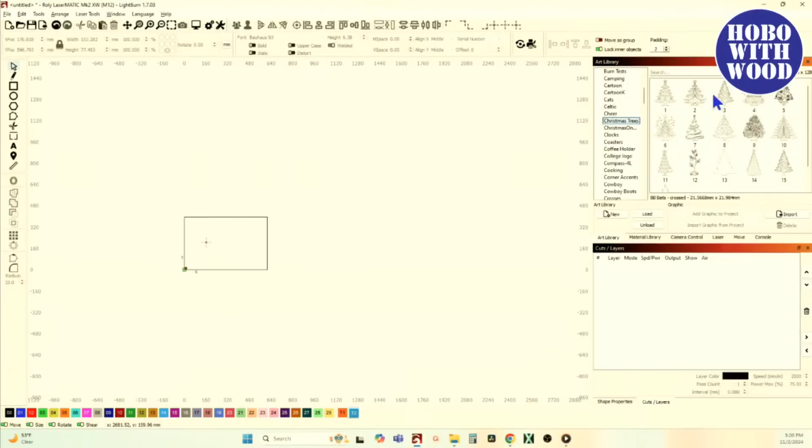I just double click that, bring it in over here, and we'll zoom into that. And while that looks pretty symmetrical, I can see right now that's a little bit cockeyed. It's not perfectly straight up and down.

For that reason, anytime I'm doing a piece like this where they're going to interlock, alignment is really crucial, at least it is for me. I'm a little bit of a perfectionist. When I slide these together, I want everything to line up where the seams are at. If it's not perfectly symmetrical, then you have to pay attention to how you assemble it. You could still slide it together so the asymmetry works, but this side would be different than this side, but only if you slid it together correctly. So I like to pay attention to my symmetry when I do these kinds of things.

Let's put this in line mode. If I were to bring a toolpath over here and put it right at the top of the star, get right to the top, right there, as I come down, you can see that star is not quite in the middle. That's not in the middle. These guys here are going to be eliminated, but the points are not lined up exactly in the center. That's what I'm looking for, and that's also why I do what I do to try and create the symmetry by eliminating half of the piece.

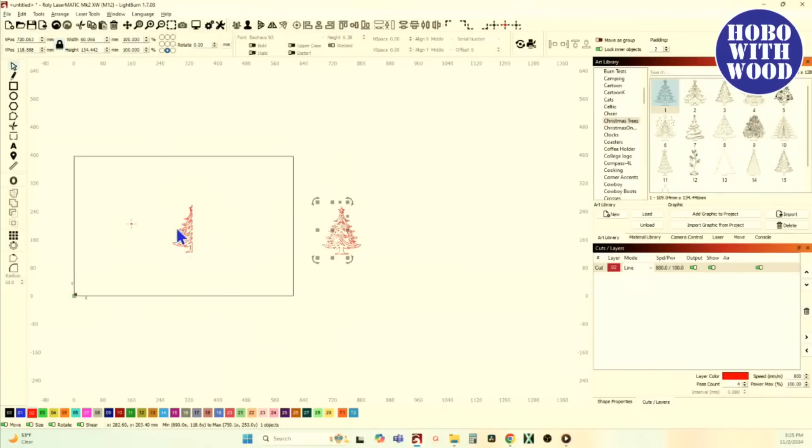But then over here, you can also go to Tools and use Cut Shapes, Alt-Shift-C. Now I want to show you the difference between cut shapes and the Boolean selection. When I cut shapes, I've got this half of the tree highlighted, but the other half of the tree is still there, whereas here it got rid of the other half of the tree.

And when I move this, it didn't cut completely because I must not have had something just right, but it leaves you with open shapes. This is completely open. Now, it's not to say you couldn't do this, but I don't know why it didn't cut that up there. I'm curious about that.

Was it not grouped? Yeah, that's all grouped together. Alt-Shift-C. Huh, I don't know why it did that. I don't want to go chasing that rabbit down the hole to find out why it didn't cut that piece.

But you could still make this work by, once you've edited that one problem, duplicating it with Control D, and then flipping it—not that way, stupid—and then bringing them together and welding them, and you'd have this little funky thing in the middle because everything wasn't lined up.

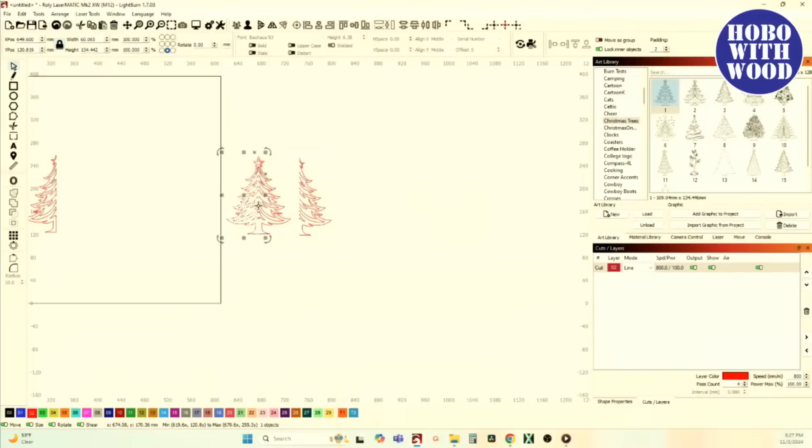But that wouldn't be a problem because of what we're going to do. We're going to use this option over here. I'll say Control D, duplicate it, flip it, move it over, and I can already see it's not going to line up perfectly. Can you see the taper, how it looks like it tapers away from each other?

We used a rectangle to cut that in half, but if I just take my padding off of there to 0 and dock that straight over—if I go in here, you see how it's not touching there.

That's because there was a little bit of inconsistency, it wasn't completely uniform in its design. You can overcome that by simply moving each side in to keep everything symmetrical. So with my control movements, units and grids, I set my control arrow movement to 0.02 millimeters, hold control and arrow the one side to the left, then select the other side and control arrow to the right. That gives me a little overlap where it wasn't touching before, now we're golden. So I hold shift, select those, and weld it together, and now I have a perfectly symmetrical Christmas tree.

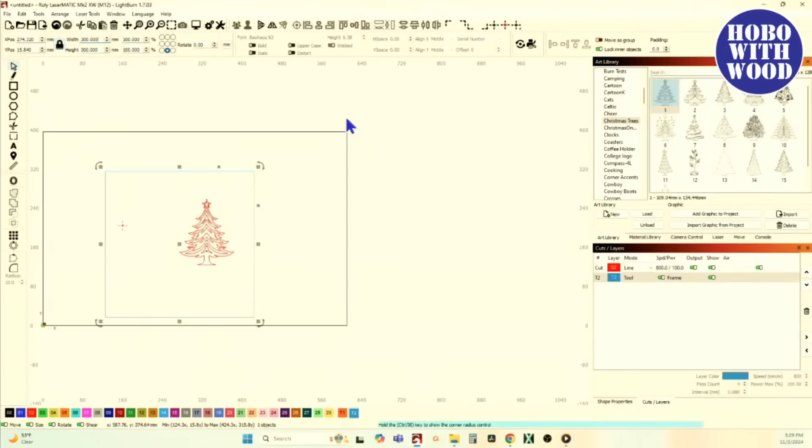At this point I might take, since I'm working with one of my most common pieces of material, my premium Baltic birch, which is 300 by 300 square, put it on a tool path and place it in the bottom corner. Also, by designing this way, if you want to maximize your material and get the absolute most out of it, leave as little meat on the bones as possible, design it within the workspace of your material so you can see, okay, this will fit, but look how much waste this is causing.

But if I shrink it down just a little bit, I could then mirror it, flip it, and put one more beside it. Now I'm getting two out of one. And then you can always scale that up if you wanted to make it out of one big piece.

So I've got my symmetrical Christmas tree here in the corner, and right now it is only 135 millimeters tall, or about 5 and a quarter inches.

I'm going to show you this, it has nothing to do with design, but if you're not familiar with the anchor point, it's what I call it. LightBurn doesn't call it anything, but there are 9 dots up there in the top. I think they might call them radio buttons, but they don't really have a true name for them. I call them anchor points because I lived on a boat for 7 years, and whenever you drop your anchor, you hope your anchor is fixed, your anchor does not move. Your boat will pivot in the wind and current around your anchor point, but the anchor never moves. So those 9 radio buttons up top, I call those my anchor points.

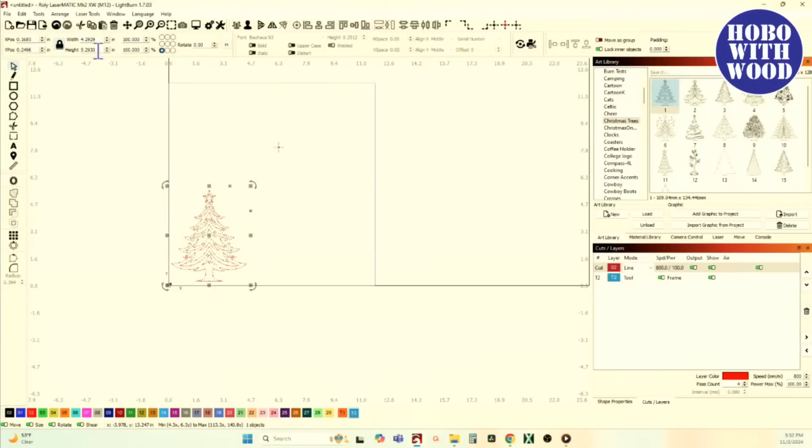Right now if I've got this positioned down in the bottom left corner of that toolpath, and I want to scale it but don't want it to move from this position, I'm going to drop my anchor in that bottom left corner. Then if I start scaling it up, with my aspect ratio locked, going from 5 and a quarter inches to 6 and a half inches, it scales up and away from that corner, so I don't have to reposition my design.

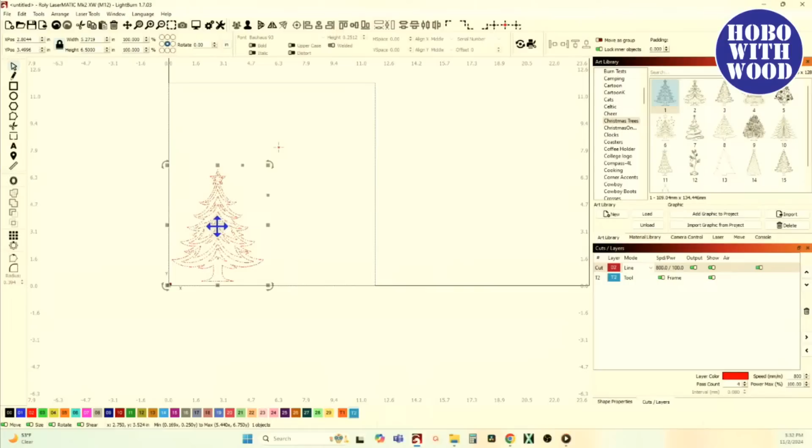If you get in the habit of using these, the most common and effective place to put the anchor when you're done is in the very center. That way, when you're scaling and changing things, it scales out in equal directions. But there are times when it benefits you to drop your anchor in a different point.

So now we've talked about anchor points. Now I've got this, and it's 6 and a half inches tall and 5 and a quarter inches wide. I've got a whole bunch of material left up top here. Also, my premium Baltic birch is a nominal thickness of 3 millimeters.

When I make these designs, I usually do my slots and tabs at 3 millimeters. Then whenever I'm going to the laser, I'll actually mic them and change my slots and tabs to fit the material I'm putting on the laser.

But there are things about doing these interlocking pieces, especially with this Christmas tree, or any design that has inner shapes that are going to be cut away. There's something you need to do, or don't need to do, in order to keep this thing where you can edit and change your slots and tabs. That's what we're going to look at now.

So before we do that, I've got this piece here. Now I want to put a tab on the bottom of this design that's going to fit into the base that I'm going to create. So I'm going to go ahead and draw me out a rectangle, and I'll put it on the same 02 cut path.

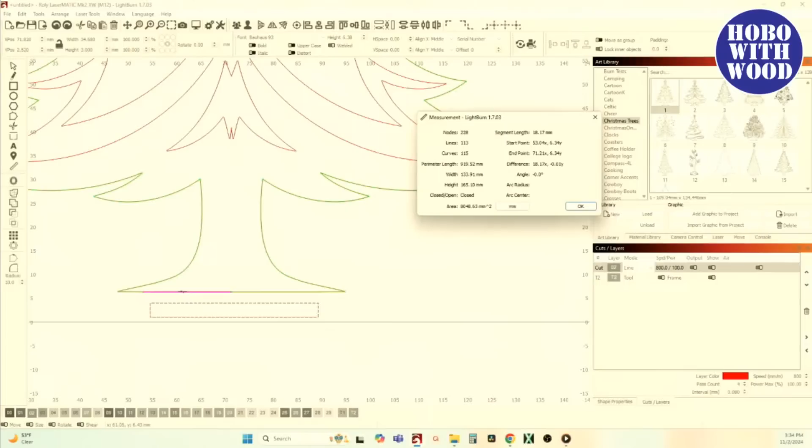And just like my slots, I'm going to make my tab 3 millimeters. Let's go back to metric. 3 millimeters, unlocking my aspect ratio. Then I'm going to grab my ruler and look at the length of the base of this tree. See how I'm not getting the entire segment down here? It's chopped up. There's part of it, there's part of it, there's part of it.

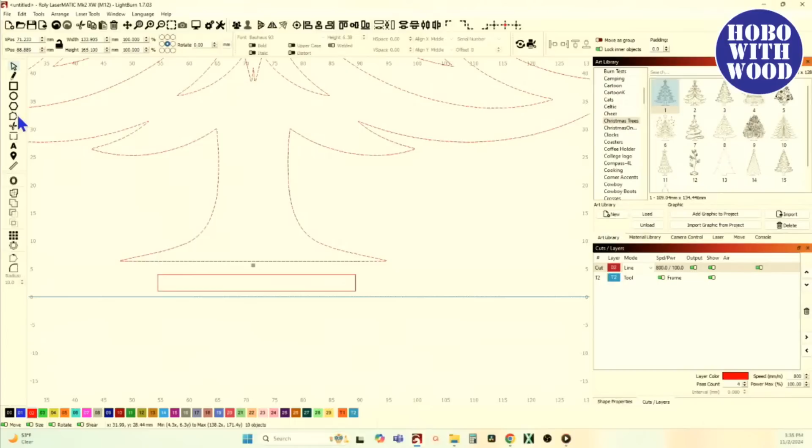The reason it's doing that is it's giving you the measurement between the nodes. If I select this entire piece, you can see it's grouped right now — you can tell by selecting it because it's got dash, dot, dot, dash. So if I ungroup that design, now I've got dashes, and I can go to my nodes and see why I was getting different segments. If I check my ruler, you can see there to there, and go back to nodes — there's that node, and there's that segment it was measuring.

So if you want to see that overall length, go back to nodes. To ensure that base is completely flat across there, select every one of those nodes on the bottom and hit the letter D, not the delete button, but D for delete. If you've seen that close enough, I'm going to zoom in. Watch that line — there's actually a little node there I didn't see. If I hit, we select them all.

Just for giggles, I'm going to come up here because I don't know how much of this you can actually see. I snapped that to that, so that's now overlapping. Well now you can see there — see how it doesn't line up over here? That's higher. It's touching in the middle, but that's not touching. So that's not completely flat.

This is another thing that Dale may or may not have been aware of in his pattern design. There was a tremendous amount of asymmetry and a lot of things that just didn't line up. If that was your Etsy design that he bought off of Etsy, then it's a lot of good work — it just wasn't Hobo ready or LightBurn friendly.

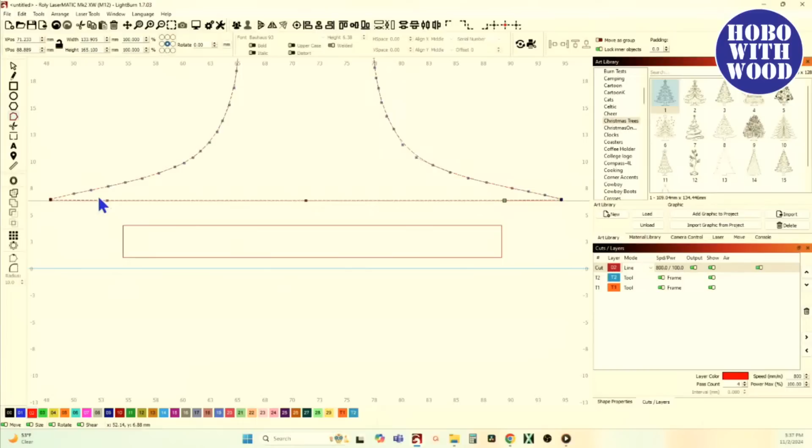So if I got that selected, I go back in here to my nodes, and I'll select all of those nodes again. If I come down here, you can see I've hit the letter D for delete — see it jumped up. There was a pretty significant difference in what being flat and what it actually was. So now select that tool line, get rid of it. Oh, not that — I hit the delete button, didn't want to. I needed to select just that tool path. There we go, and now I hit the delete button.

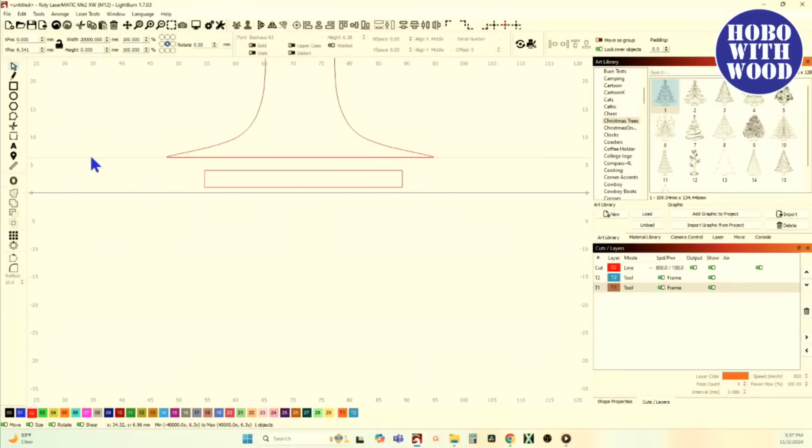Now when I put my ruler down here and measure that bottom, you see how it goes all the way across from corner to corner, and it tells me it's 46.72 millimeters in overall length. So I'm just going to say 46 millimeters, and that's what I'm going to make that tab. It's unlocked, I've got a height of 3, and I'm going to tell it 46.

Now I'm going to select my tree, tell it to go to vertical center, and now I can move this up in one of two ways.

I can have both of those selected right there and use Alt-Shift-V for moving it vertical, and it's going to jump right up there. Or, if you don't remember shortcuts, you can go to move selected object, or distribute, to move together horizontally or move together vertically. Alt-Shift-V and Alt-Shift-H is in your distribute menu, underneath the arrange menu.

But another way you can do that is you select just this one, and this works only when you're designing on your work area of LightBurn. If you move it out of the work area, this tool will not work. It must be in the design area of LightBurn. So I select just this one, and these up here are your docking tools: dock left, dock right, dock up, dock down.

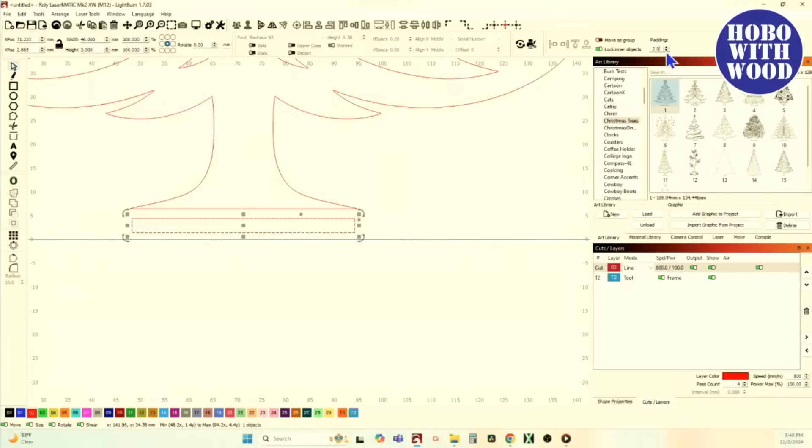If it doesn't go up all the way, I'll change this padding value. If I change that padding value to 2 and tell it to dock upward, it's only going to get within 2 millimeters of that. It will not go all the way to the base of that tree. But if I change my padding to 0, and tell it to dock upward, because I flattened the bottom of that tree, they're now perfectly aligned and right up against one another.

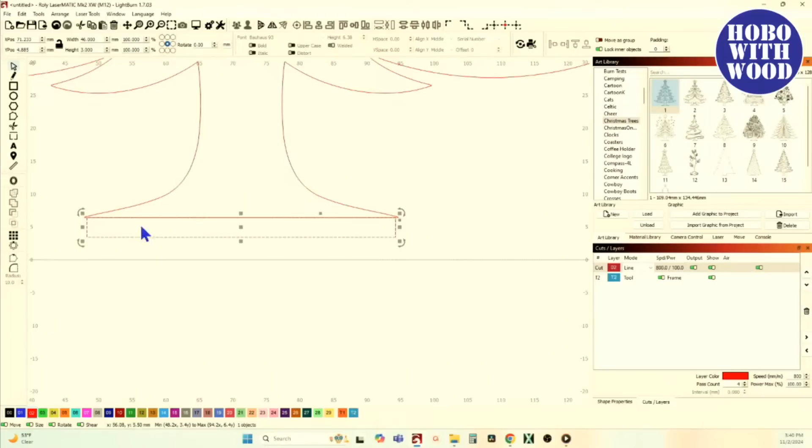Now, something I've never done, and I just thought of this, honestly I'm curious: can you dock it past 0? Can you put in a negative number and take it beyond its boundary? Let's find out, because there's times when you want it to actually overlap and go past it. So let's undo that. Undo, there we go. Now, can I go a negative value? No, 0 is as far as you can go. You can't do a -1.

And that actually would come in handy, because if you didn't go to the trouble of getting the perfectly straight line and eliminating all those nodes, when you weld those two together, you're going to get rid of all those nodes anyway - they're going to go bye-bye. But it wouldn't weld together perfectly unless the two overlapped each other. Then when you weld them together, now they weld up perfect. Then you could resize your tab size. There's always another way.

So I've got my padding at 0. I'll take that and dock it straight up. Now I can hold my shift button, grab that, and hit my weld Boolean tool over here, and now that's welded together. And because it was a little longer than 46, I got that little ear, and that's fine. And over here too, but they're perfectly symmetrical, and it's going to work.

So now I've got a 3mm tab added to the bottom. I'm going to group it back together, duplicate it by hitting Control D, and move it over here. In fact, you can do this at this time, because we're going to put these together with a middle slot, but one's got to be on the top and one's got to be at the bottom. So I'm going to go ahead and rotate this.

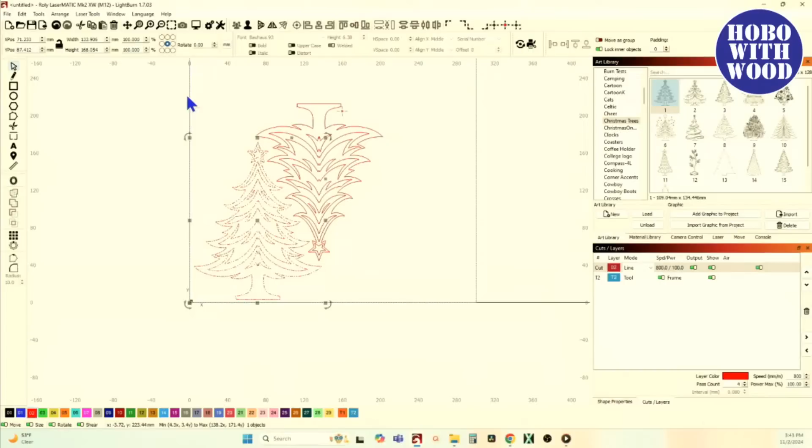Actually, I'm going to back up just a minute to make things easy on this old noggin. Instead of having to remember all these decimal points, I'm going to delete that, undo it. I'm going to select that entire image, lock its aspect ratio. Right now it's showing 168 and some change. I'm just going to tell it to go to 170 mil. There, now it's a nice even round number.

Now Control D, duplicate it, and select it. Select that duplication, rotate it twice, move it over here, and get it in position. And I know that it's 170 mil.

So now I'm going to take and get my rectangle tool again, and I want to draw out a rectangle that needs to be, in this case, 3 mil wide, and it needs to be 100. And I need to unlock my aspect ratio because I've got my width correct. Now I need to set my height.

Now we know that the height overall is 170 mil. We need half of that. And you can do mathematical equations in these fields. So all you have to do is put in the 170 mil and divide it by 2 and hit enter.

Now, some of you are a whole lot smarter and faster than I am, and you probably could have done that with the decimals of 168.054. Well, half of that is - well, I ain't that good or I ain't that fast, and I don't need to be because LightBurn can do it for you. I use the round numbers because it's easier. But put in your total overall height, then the division sign and the number 2, and LightBurn will do that math for you and puts it at 85 mil.

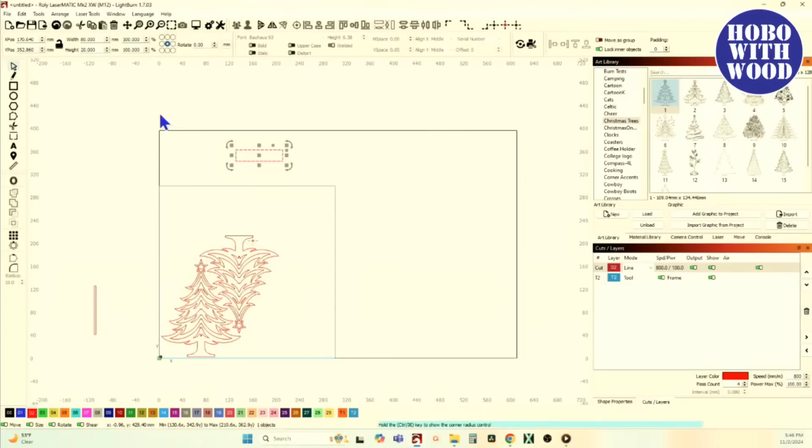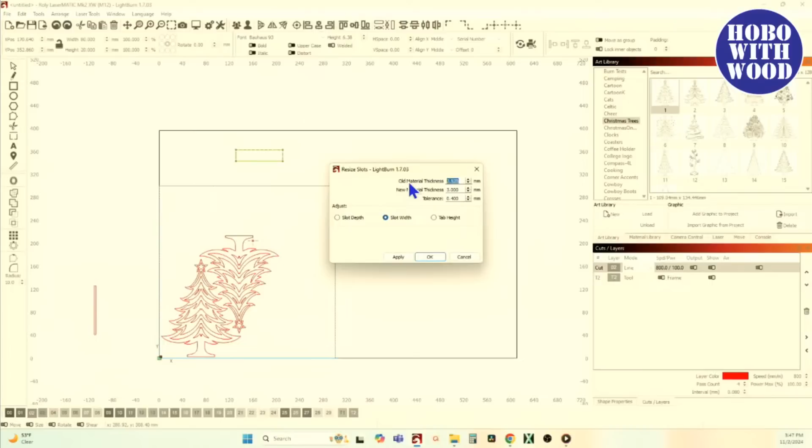If I have that selected and I'm using the resize slots in selection, and I'm wanting to change the slot width, the width of the slot can be this way or it can be this way, depending on how your design piece is and how you interpret it. So if I tell it the old material thickness is 20 mil, it's going to move that slot from this edge to this edge by whatever amount you tell it here. But if I tell it the material thickness is 80, it's going to move that same square from the inside or from either side, moving it towards the inside.

So the resize slots in selection tool is looking for parallel nodes, and they must be constantly connected. So if you cut out that middle section of your design when you're doing these inner pieces, LightBurn no longer has 2 consecutive nodes that it can change for your material thickness.

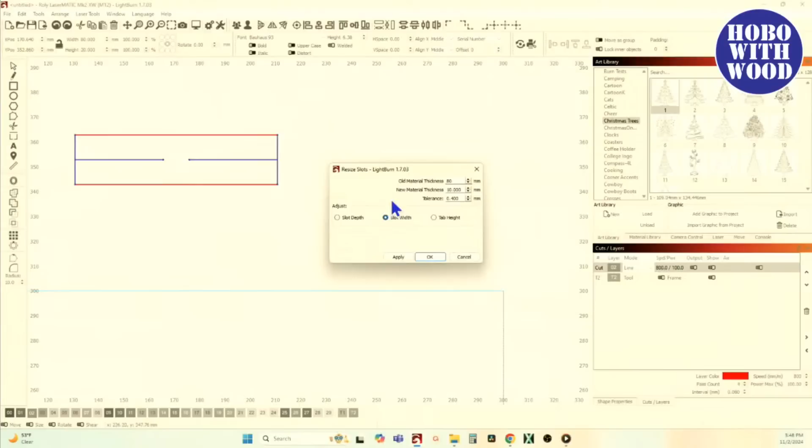And I'll show you this and I'll look at questions. Switch - so what you have to do, cancel that, delete that. We've already sized it to 3 and half of the 170, so 3 and 85. So I'm going to take that and tell it to come over here, and I'm going to align it to the center and to the bottom.

And now I'm going to take that and duplicate it, Control D, and I'm going to do the same thing over here. I'm going to tell it to align to the center and the bottom. But actually it's aligned to the top because I got it flipped.

Now I will not. Now what a lot of people do and struggle with is if you take your original piece, call that A, subtract B, and subtract that out. Well, there's your slot, there's where it's going to slide together. The problem is now you no longer have those two consecutive parallel nodes from that corner to that corner. They're broken up and not connected here.

So if I try to resize slots and selection, the only thing it's going to recognize as a slot is this piece up here. It won't recognize it as a group. So if I ungroup it, go into tools, resize slots and selection, I know it was 3 mil slot width. You see there, it recognizes that, but it doesn't recognize any other part of that slot because they're not connected here or here. It has to be, and here you have the 4 nodes - there's 1, 2, 3, 4. That's the only ones it's going to see and change.

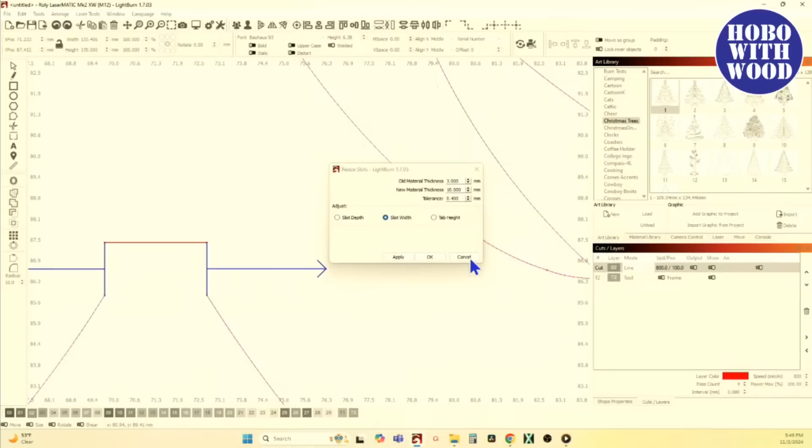So we're going to cancel and undo, and I'm going to come back looking for questions - I don't know if we've got any or not. But when you do these designs, it doesn't matter if you're doing a Christmas tree, earring hanger, whatever, Christmas or Thanksgiving turkey, whatever you're going to make - if you're making these interlocking pieces, you need to leave this middle piece completely intact.

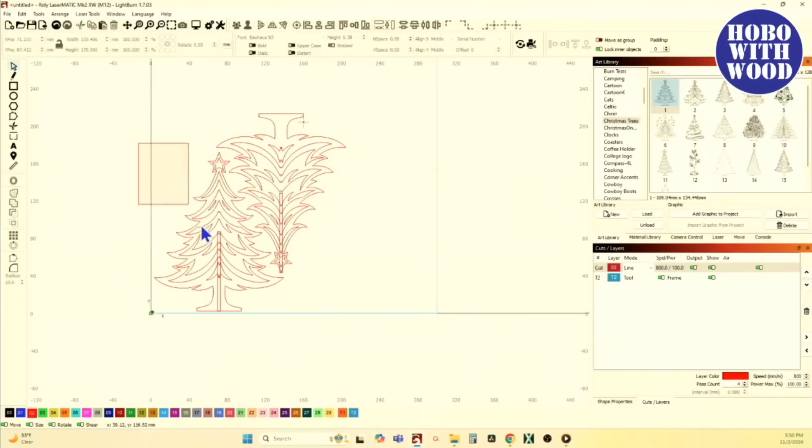So that now whenever you select it - in fact you would need to have that grouped. Let's see if I grab all of that. I got that and don't want it, so you hold control and select it to deselect it. And I'm going to deselect this one, and group that tree back together. Oh, never mind, I didn't have to do that because I went back far enough.

These inner pieces right here are going to cut out and fall away, so those are wasted cuts. It's okay to delete them - not necessary, but it'll save you time if you do, because they're going to cut and fall out. And these are going to cut and fall out too.

But with that being separate, now when I select that and tell it to do tools, resize slots and selection, and tell it I need to change my slot width, I can put in whatever my material thickness is to what it's actually going to be. And it's going to move that entire piece from the center out. You do that to both of those rectangles, and it would create the appropriate slot size.

So I'm going to jump over here to my last mark and see if anybody's posted. There you go. Believe it or not folks, that's the same kind of mark I make on legal documents now. So that's my legal mark.

Let's see here, question from Jeffrey: is there a way to thicken the cut lines on a more fragile design? Yeah, I think I understand what you're asking. Yes, there is, it's very, very simple.

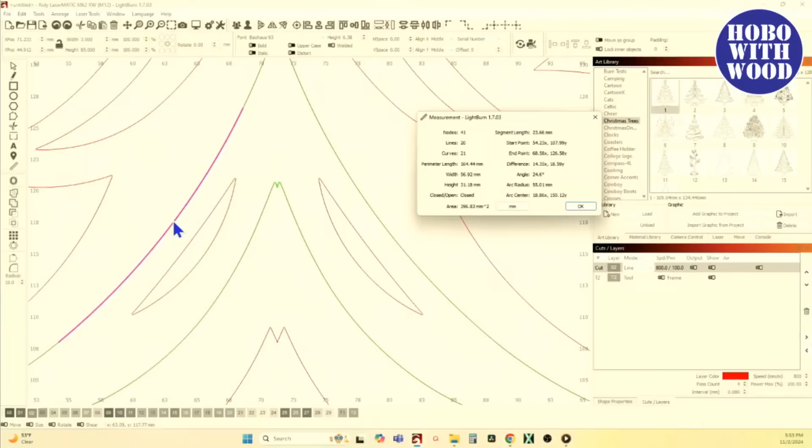So if I was doing a design and I measured here from here to here, that's 2 millimeters. And from here to here, that's 1.5 or 1.4 millimeters. If I was like, okay, well, that's going to be so small...

...and so I need that to be a little bit larger gap right there, then all you would need to do is simply, and these are still grouped. I'm going to take this, Control D, duplicate that, bring it over here so I don't mess up my other piece. I'm going to ungroup that now. And if this was something that was going to be too small or too fragile, you just do a simple offset. You need to go outward so you can make that bigger and delete your original.

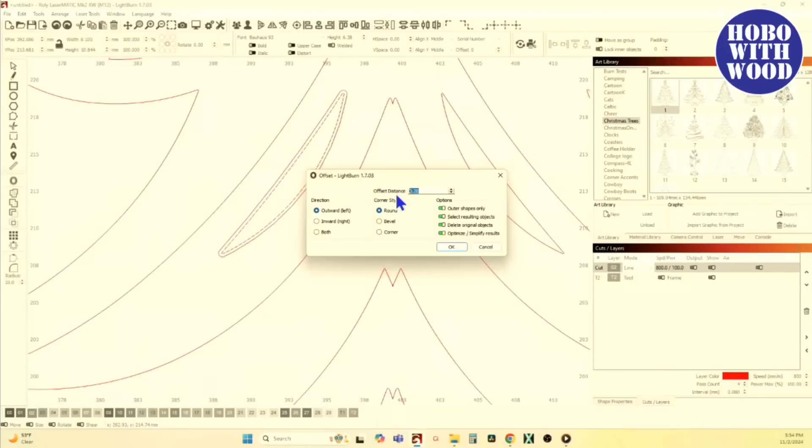And if, say, you wanted to add a millimeter, you would add 0.5 millimeter in each direction, and now that's going to be 1 millimeter larger. I'm going to delete that and delete that because those do not need to be in this design.

But if this area right here in this design, because there's my outer perimeter and there is the outer perimeter of that inner cut, and it's 2 millimeters, well, there are a couple of things you could do. Are y'all tired of hearing me say there's always another way? There's not just one way in LightBurn.

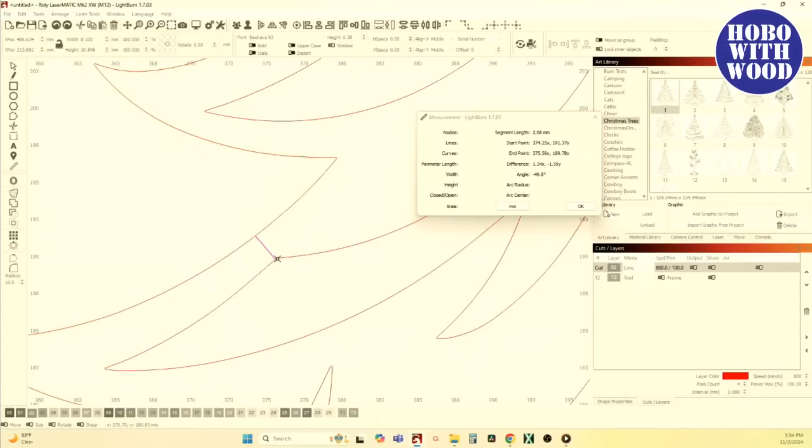If I was concerned about that area right there being 2 millimeters, I could approach this a couple of ways. I could simply select this and do an inward offset, and in this case, if I only do a 0.5 mil, it's only going to come in 0.5 mil. So if I did a 1 millimeter inward offset, delete the original, then it's going to beef that up.

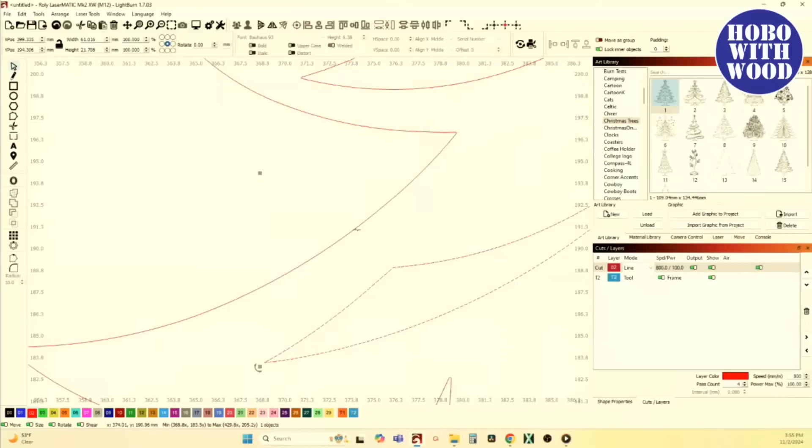But I would have to do that and check all these in it, and then also it does some funky little things right there.

So another thing you could do to prevent that is, okay, well, I want it to be about that size, but if I change that, it messes up the look of it. So then what I need to do is select my outermost piece and do an outward offset of 1 millimeter, and delete the original. Now that's going to change my overall size, and if I've already done my tab, it's going to change the tab. And because I did round, it changed the corners of it.

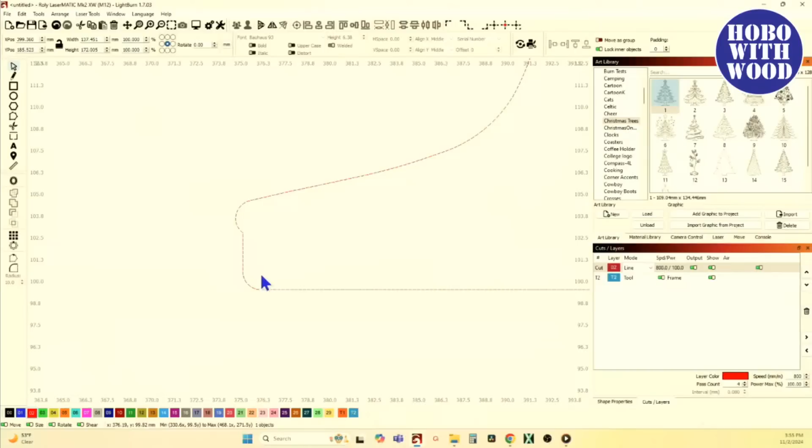So those are things that you hope you see and identify before you get too far down the path, so you don't have to undo a lot of things you've already done or redo a lot of things you've already done. And trust me, when you're designing...

...the undo feature will get worn out, like if there was a way to put wear on the screen from clicking so much, the undo feature would show a lot of wear when you're creating and designing, especially if you're doing it organically - like, let's try this or do that. Yeah, that didn't work. Undo, undo, undo, undo. Let's try this. Undo, undo, undo, undo.

So there are multiple ways you can make something that's going to be too fragile not as fragile. And sometimes it's just a matter of, it's not going to work if you do it that small. In order to keep the detail and have the look you want, it's either got to be bigger or you've got to find another design. All right, so that was Jeffrey.

Bob asks: when using the resize slots and tabs, does it take the anchor point into consideration when it resizes?

No, I don't think so, but we'll look at it real quick. It's an easy test - I've never noticed it to be a problem, but this is how easy it is to test. I'm going to draw a rectangle here, and I'm going to do an outward offset, do corners... so I don't, there we go.

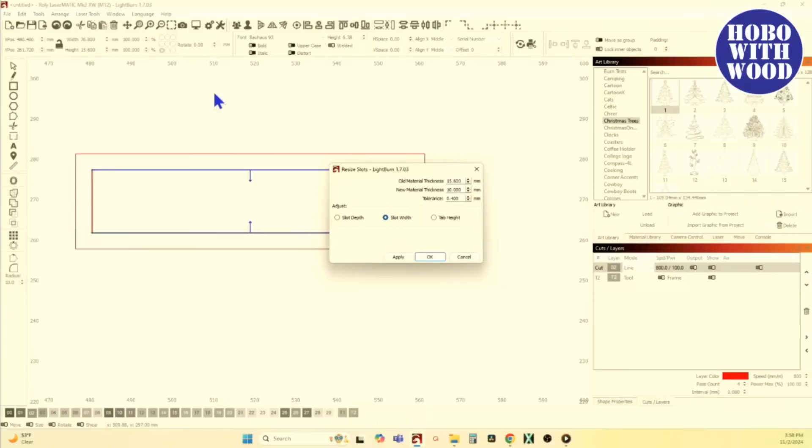So this one has a height of 15.6. So let's put the anchor point over here in the corner and go to resize, slots and selection, 15.6 slot width. And with our anchor point over here in the corner, it's just going to move these down. Does not take that into consideration. And we tell it to apply.

It still stayed centered up within that - it just moved those two lines down. And I didn't think that it affected it, but better be sure. That was an easy test to find out. Delete that. Next question.

Control Z to undo, Control Z, Command Z. All right, so let me make my mark. Now go back here and get rid of what we were done there.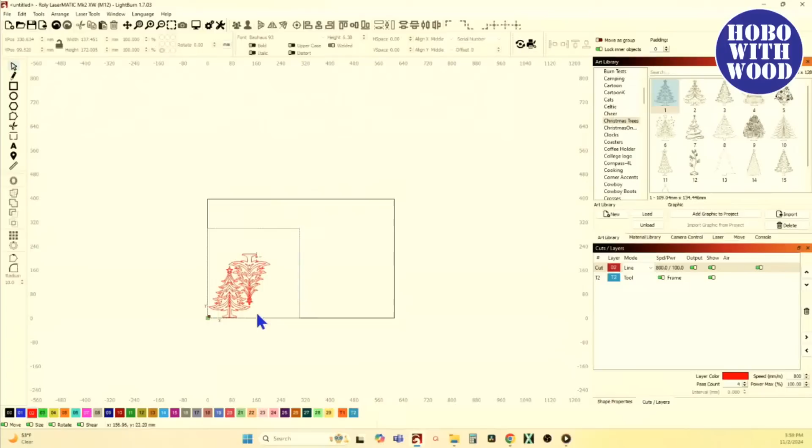I've got my two mirrored pieces that are symmetrical. I've got my 3 millimeter rectangle in the bottom, and also in the bottom, but it's the top since I've got it inverted.

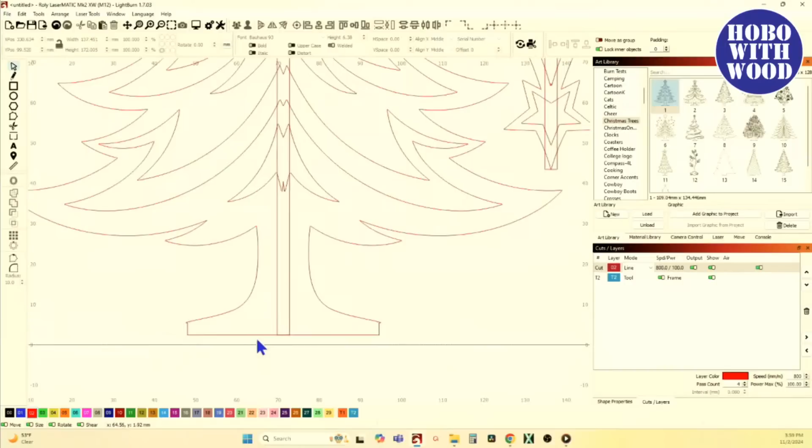Now I can actually take and look. And what we found was that 46 mil. Well, let me get my ruler. That's saying it's 46.53. Oh, it's because I scaled it up a minute ago.

46.53. All right, so now I'm going to draw out a rectangle with unlocked aspect ratio, 46.53 and 3 mil. So that's the size of that slot. If I was doing it with 3 millimeter wood, I'm going to hit Control D to duplicate that, use my less than to select it first, select it, and less than to rotate it.

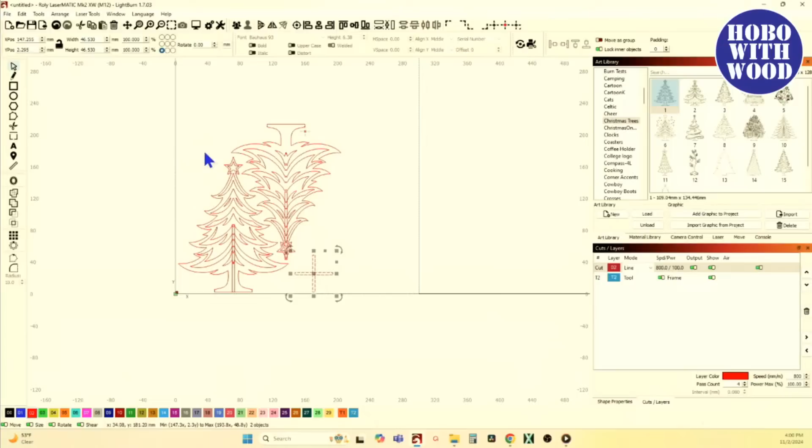Now I'm going to select them both, and I'm going to come down. Where do I want to do it at? Let's do it right here, because I'm looking here. If I was to make a square, I could do it either place, either there. In fact, let's do it over there. That's actually more of a true waste area right there.

So now I'm going to take that and I'm going to do an offset, and I don't want to do the corners. I'm going to do round, and I'm going to do an outward offset in each direction, 5 mil, and do not delete the original, and say okay.

So that just created the base for these two pieces, once they're interlocked, to slide into here. And it's going to be done on this piece of the wood. In fact, now I could even bring it down to there to minimize my waste. And I would put this skeleton over my skeleton pile, where I will use all of that meat on another project when I'm just needing little bits and pieces.

So that is that. That quick, we did that. And like I said, I used a Christmas tree because I did this design and gave the design away to my patrons. I sent this out to every patron yesterday.

I was talking with someone, and I was like, you know what, this could even, you actually could do it with the Christmas tree. But if you didn't want to do this Christmas tree, if you used a different shape and put holes in and around certain proper placement, then you can make an earring stand that you could put on your nightstand or on the dresser for the ladies, or what do they call them, the makeup... I don't know, it's been so long since I lived in that world, I don't even know.

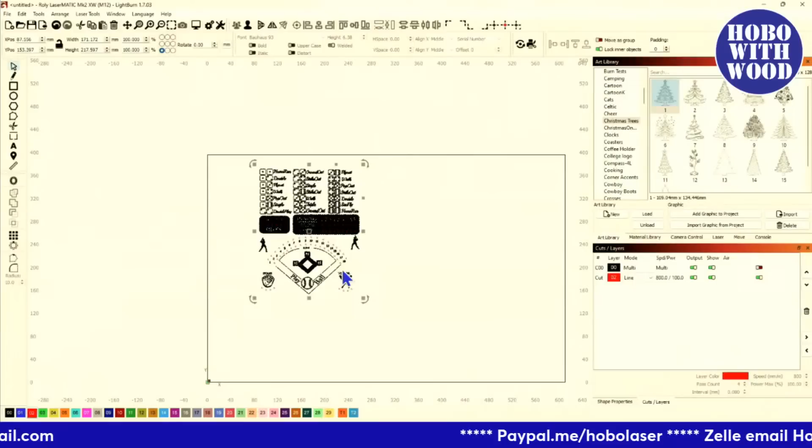So this was a design that Dell was working on. It's a baseball game, and he had a problem that the holes are not uniform, and they weren't the size that he wanted them to be. And he was going to cut this out.

It's a baseball game, so if we turn off the black layer completely, because we're not going to address - there are a lot of symmetry problems with this design that I would never send out as is, because I want it to - the laser can do, depending on your laser, the Roly can do dang near perfection if you're working with dang near perfection.

But my high school MS-DOS teacher in 1987 - and I'm sure he wasn't the one that coined this phrase, but he preached it to us every week - garbage in, garbage out. Garbage in, garbage out. When you're programming and you're sending garbage information into the program, you're going to get a garbage result.

Well, this is the same thing. It's not MS-DOS, but if you send in poor information or garbage or less than perfection, you're going to get a less than perfect result from your laser, no matter how good your laser is.

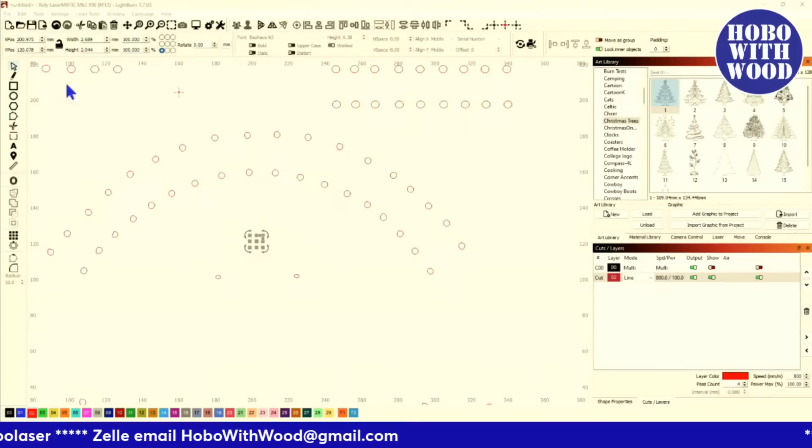And if we look at this right now, what all's grouped? They're all grouped, so let's ungroup it all. And if I look at just that one, there we go - it's 2.689 width and 2.044 high. And if we zoom in, you can see it's oval shaped, not a circle, but that's okay.

That's one shape. Then if we come up here and look at this one, that's another shape, and it's 3.4 and 3.5, but it's not round or even oval - it's not even, I wouldn't even call that ovaloid. It's just a shape.

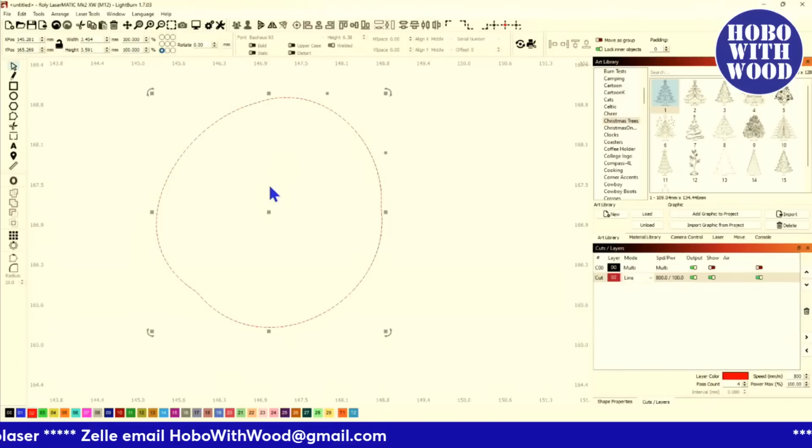And if we go back to Jason's comments, Jason said select one and make it the new size, then select all of them except that one, shift and select that one, so it's the last thing you selected, then click arrange and make same width and same height.

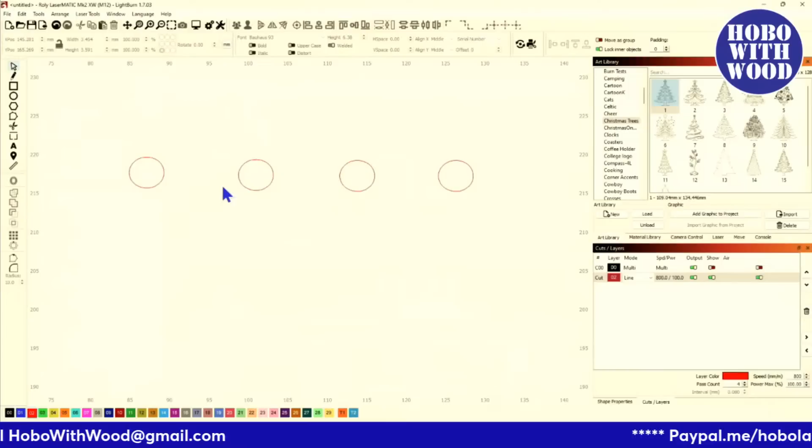Now, so if the ultimate goal was to make these all 3 millimeters, if I drew out a perfect circle holding my shift and control to draw it out from the center and tell it I wanted that to be aspect ratio lock of 3 millimeters, and then I hold my shift button and select that one and tell it to go to the center.

And to keep these from being confused, I'm going to put this on - we'll put it so it's still nice and visible, we'll put it on the green and put it in line mode so it stands out but is still easy to work with. All right, so the green one is what I want, the red is what I'm working with.

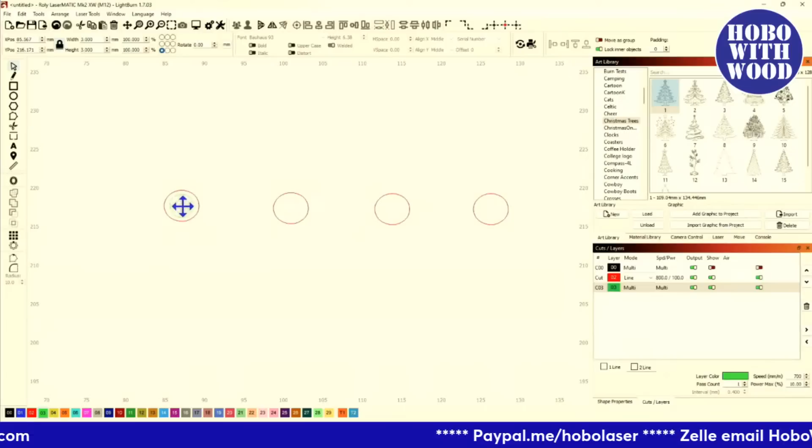Here, if I take this piece, the original one, let's set this out of the way for right now - we're going to need it, but we don't need it to do Jason's suggestion. If I take this piece and tell it to unlock the aspect ratio because it's not symmetrical, and I tell it to go 3 and 3, I don't know if that's perfectly round or not, and I don't think it is, but it's awful darn close.

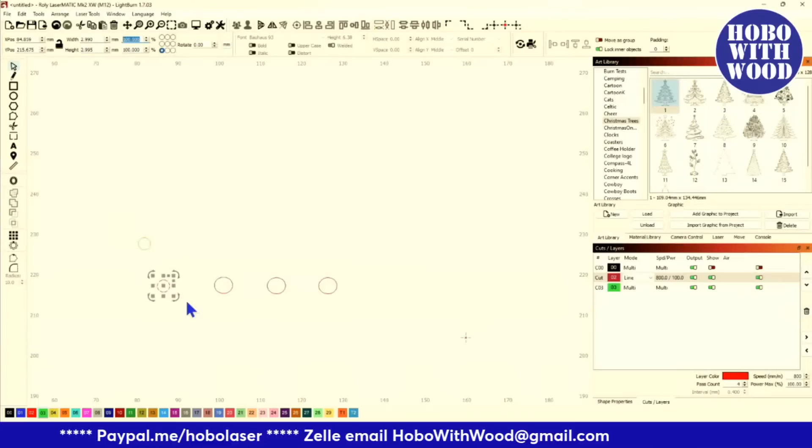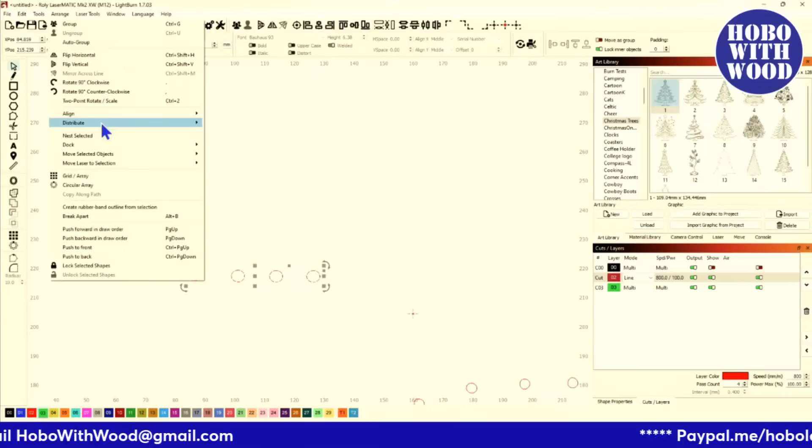So now if I take that, I select these other 3 - they're not grouped, but I've got those selected. Hold my shift button and select the one I just made 3 and 3. Now he said go into the arrange menu, and it's supposed to have up here in the toolbar, and I think it used to be there, but I could not find it anywhere. I could not find the right information, but you don't need to go up there.

You select the 3 that you want to change, hold your shift button, select the one that you want it to be, and if you have the arrange tool menu up here - there it is - make selected items the same width and make selected items the same height. There are 2 buttons in that toolbar for changing width and height of selected shapes. But instead of clicking both, you can just hold shift and select one, and it will change height and width in one click.

So I selected the first 3 that are too large, held my shift button, selected the one that I want it to be, and clicked make them the same width. It changes all of those to the correct size. It did not relocate them, it did not move anything, they stayed in their fixed position.

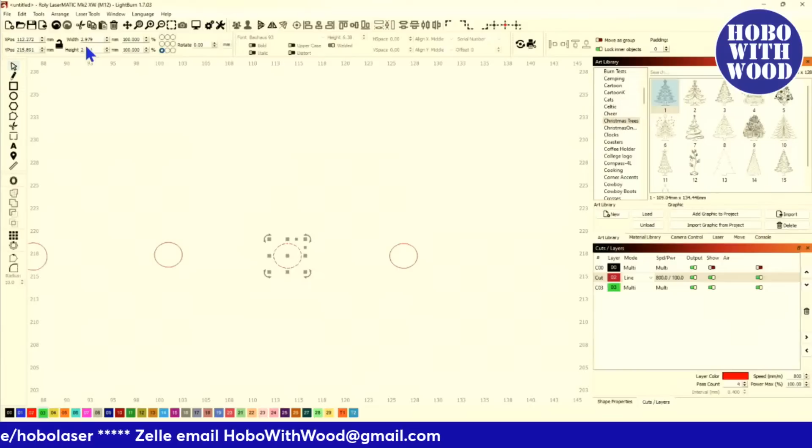Now if we look at the individual sizes, well, looky there - 2.979. It's somehow no longer 3. This is why I said it worked, but it ain't perfect. That's because there were so many irregularities with this piece to begin with. So now that's 3 and 3, or at least you think it is.

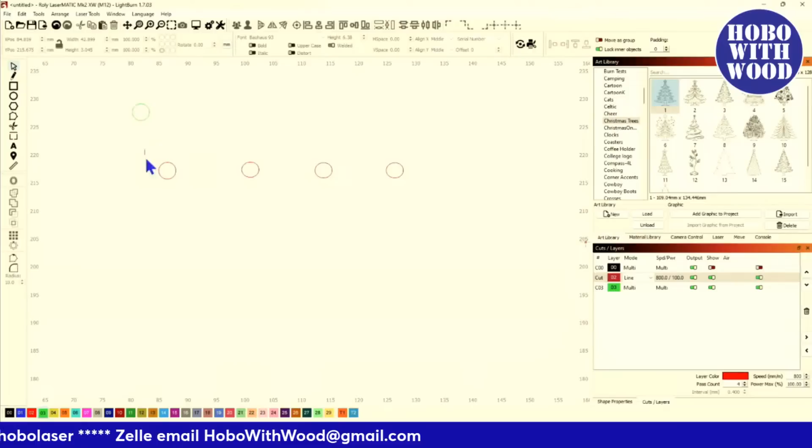So I'm going to select those 3 and select that one again, holding shift. But now when I look at that, that's 3 and 3, but that's 3 and 2. I just scrolled it up - it was 2.7 something. It did not go 3 and 3. Why? Because it was not a perfect circle or sphere to begin with. There was some elliptical tendencies to that part, so it wasn't going to work.

So if it was perfect, and if it was designed in LightBurn, after I get through with what I'm doing to this, this will work. But it won't work now because it's not a perfect situation.

So let's look here. I don't know if I'm okay. I have a suggestion that might help you out. Oh, we already did that.

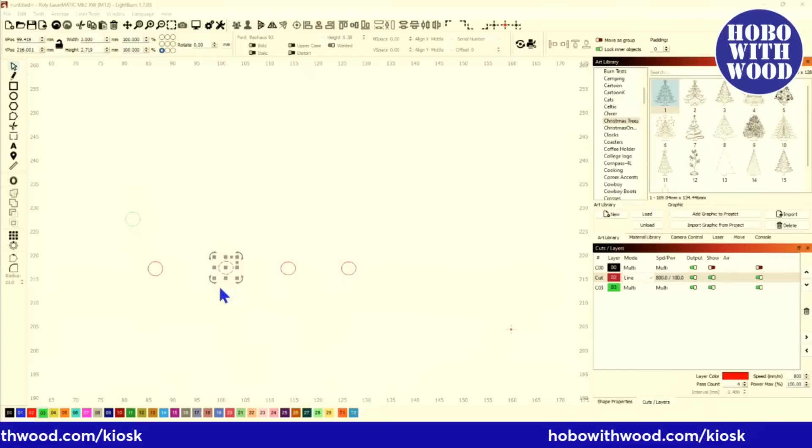So here's a fix for when you have this problem. We scroll out here. In fact, I'm going to go back to where I had that first green one in there. There we go - actually, I'm going to go on back. There's what he started with.

And we've got 2 arches here, a couple of different things going on, different groupings. Because I was asleep when he posted this, I didn't have a chance - he'd already gotten a resolution before I was able to respond. This is how I would approach it. But the way he corrected it, he went in and recreated and repositioned each individual circle, and that was a little bit tedious. It wasn't brain surgery, but it was time consuming. So here's how you can save a tremendous amount of time.

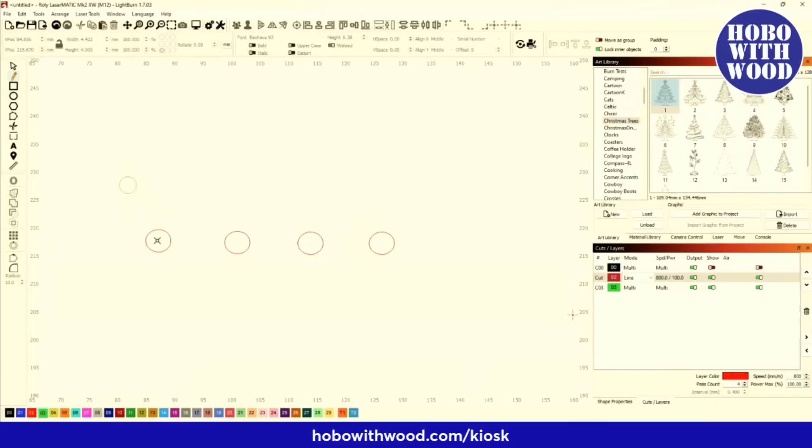I know that I need 4 right here. I'm going to come up here and grab my pencil tool and draw a straight line from here. I get my crosshairs right in the center of that circle, hold my shift button, and draw a straight line over here. You see these are not even perfectly lined up because I'm not in the center of that circle. But I'm going to get right there - oh, I didn't let go in time. Try again, pencil.

And now I've got a straight line right there. I didn't want to do that on my selector tool. This one I drew out and it is a 3x3 perfect sphere.

I'm going to take that and bring that center right there to the end of that line. I get my crosshairs - that tells me the center of the sphere. Let's get it where you can see it good. The center of the sphere is on the end of that line when you get those crosshairs right there.

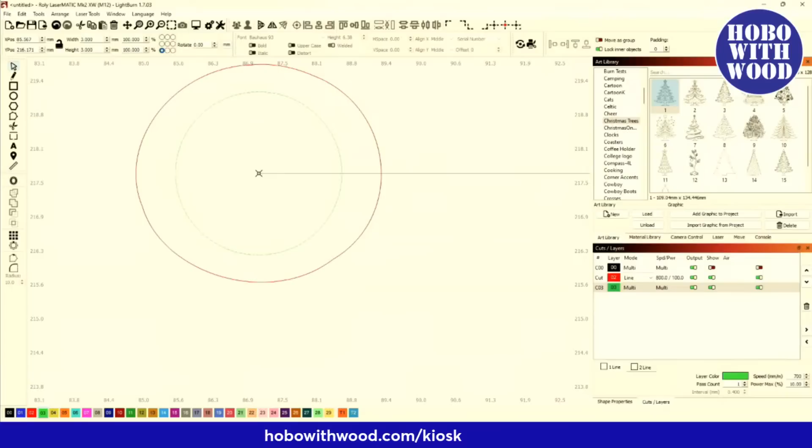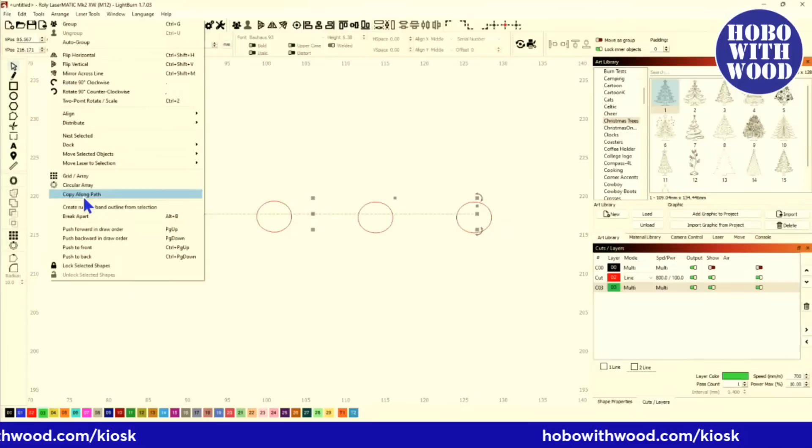Now I'm going to select - I've got the circle selected. I want you to see all this. I'm holding shift and I'm going to select the path, the line, and come up here to arrange, and I'm going to copy along path. That's going to ask me how many copies do I want. I want 4 copies. If we look here, it's got them perfectly spaced out to where the 4th one is in the very end, or the center is at the end of that line. I can say okay. So that quick, I recreated those, and I wouldn't need that line anymore.

I could get rid of that. All of these red ones could go bye-bye.

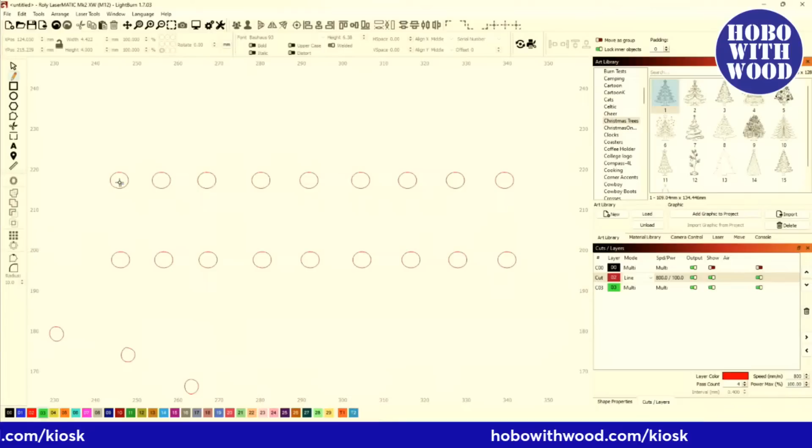Now I come over here, get my pencil tool again. I'm going to get right in the center of that straight line over to the center of that. These are identical. So all I'm going to do now is draw out a perfect sphere, holding Control and Shift to draw it out from the center. Tell it I want it to be 3 millimeters.

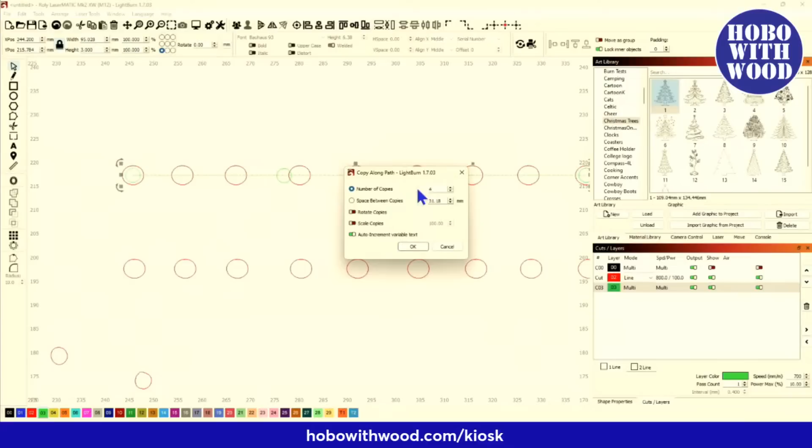And then I'm going to drag it down and put it right on the end of that line to get my crosshairs right there. Hold my Shift button, select that line, arrange, copy along path. How many copies do I need? Well, I can't see them because I'm not zooming. And this is a problem with LightBurn - not a problem, but right here with that menu open, you can't scroll in or out. So I need to place that where I can see.

And now arrange, copy along path, move that menu so I can see, and I will need more copies. So I'll just start increasing my copy numbers until - there we go. I've got one in each of those, and they're evenly spaced, and I can say okay.

And then I could actually just turn off the red layer - or no, I'm sorry, not the red layer, turn off the green layer. Select all of these and hit the delete button to get rid of them. Turn back on my green layer. Select that line and get rid of it.

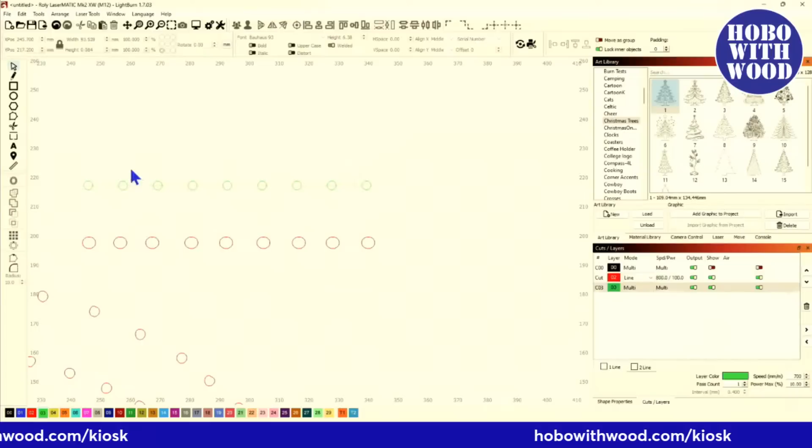Group those, and now duplicate them, Control D, and come down here and tell it to go to this one right in the center. I've grouped these to begin with, and because they're grouped, I just have to tell it to go to the center of this one. And it moves them all right down there and keeps everything spaced. We'll see if they're lined up there.

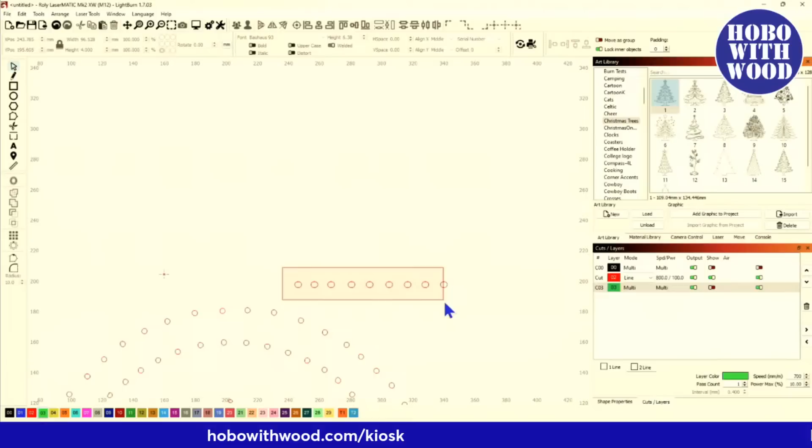But now I can turn off the green again. Select all those guys and delete them, turn my green back on. So now I've got those all done and redone, and I'm not having to do all of them, just doing one.

Now these are simple enough, there's just 3 of them. So in the amount of time it would take you to go to the trouble of duplicating, it's just as easy to take those and make 3 millimeter circles, duplicate it. 1, 2, that's 3 duplications there - 2 duplications in the original.

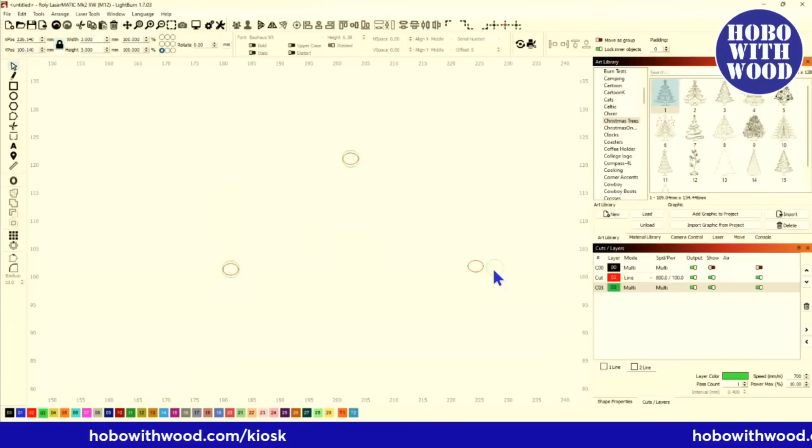You snap that into place. Grab one, snap that into place. Grab one and snap that one into place. Turn off my green, select all 3, delete. Turn on my green.

Now these 2 are identical, but these are not. And these are on a curve. This one's a little bit more challenging, but it's really not that difficult.

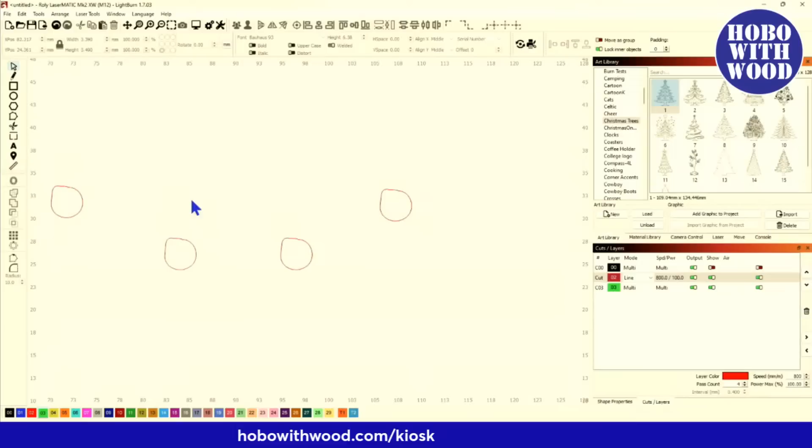I'm going to come down here and do the same thing. Now, see, these have got a funky little teardrop shape going on with them. I noticed whenever I selected them, I could tell it to go to 3 by 3, and it would do that, but it'd still be teardrop shape. It was kind of funky.

But if I come over here and get my pencil tool, come to the middle of this one, hold my shift button and draw out a straight line until I get to the middle of that one. Then I'm going to get my arrow tool, my selector tool, select that line, go into node editing, and hit the letter M for middle. It doesn't matter if I come over here, actually. I can just hit the letter M, and that's going to put a node over there in the middle.

Then I'm going to hover over that node, and hit the letter S for smooth. If you hold your cursor over the node editing tool, it'll give you all those shortcuts. S for smooth, M for middle. All your shortcuts are there by just hovering over that tool.

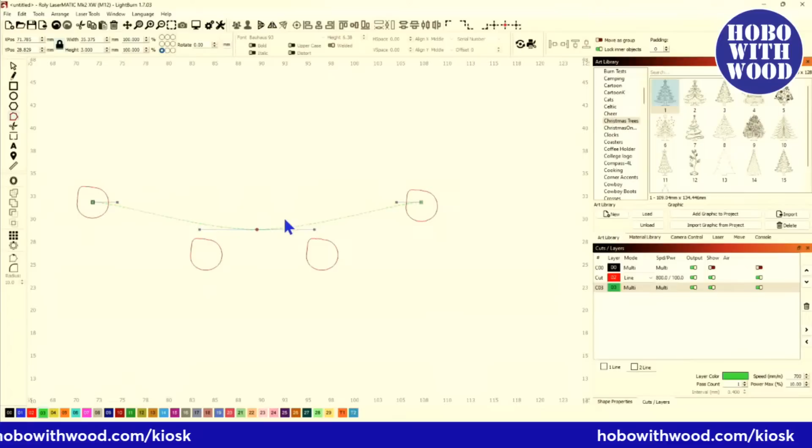But now that that's smooth, I'm going to select just that node, and use my shift button and my down arrow button, and start drawing that down into a curve that's similar to what's there. Now, these handles on either end of this are coming still straight out, and that's causing you to have a little bit of a straight and then a turn down.

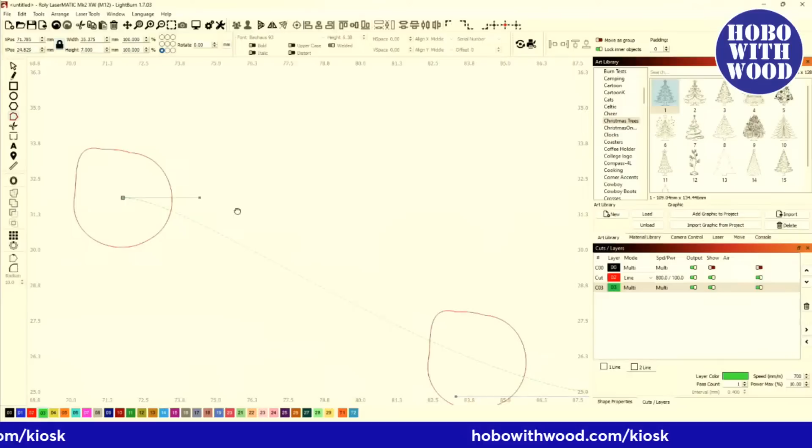So if you grab that handle and just bring it down to your line, your curve, just bring it down to there where it overlaps, it gives you a nice even curve. And its position looks pretty good.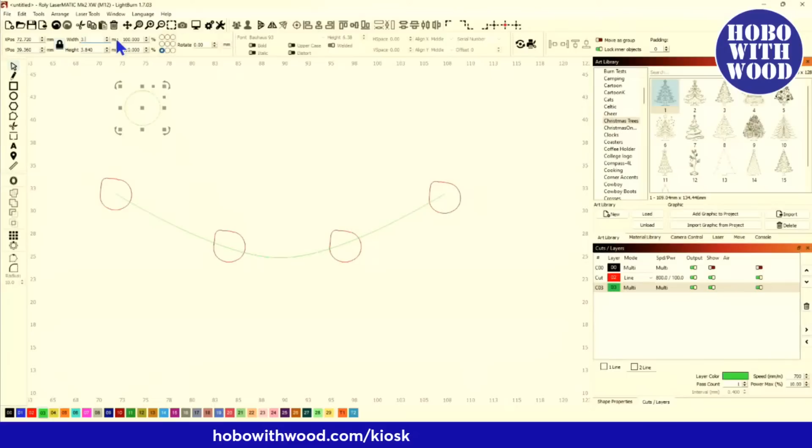Now I'll draw out a perfect circle. Tell it to be 3 millimeters. Snap it to the end of that curved line I just did. Hold my shift button, select the curved line, and do the same thing. Copy along the path. And I only need 4 of them.

And it goes to the end of the line, and say okay, turn off my red layer, or turn off my green layer. Turn off the green layer. Select all those, delete it, turn them back on, delete that toolpath, select all those, group them. Now with those grouped, hit Control D, duplicate it.

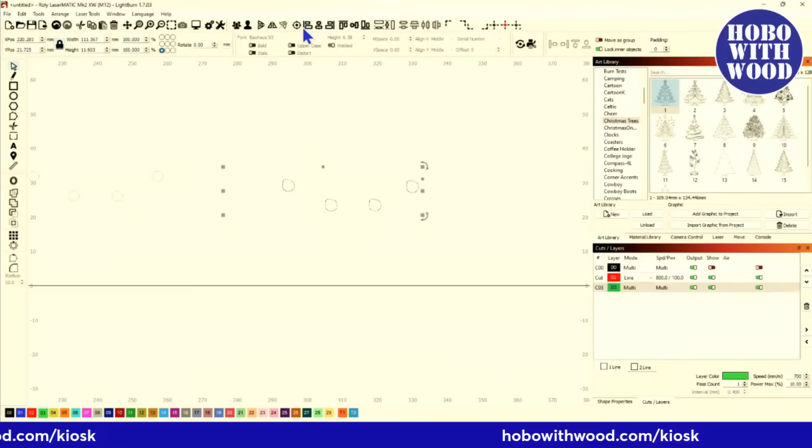And I'm going to move it over here just using the arrow keys. But then I'm going to zoom in tight right over here. I'm going to group all of these and then select that group, hold my shift button, select that group, and tell it to bullseye, center them up. Then all I have to do is select just the red and delete that. Now those are done.

Now, do you know how we're going to do these two? The same way. And these two, the asymmetry of this design really shows itself up when I do these, because the two furthest most circles are not on the same plane.

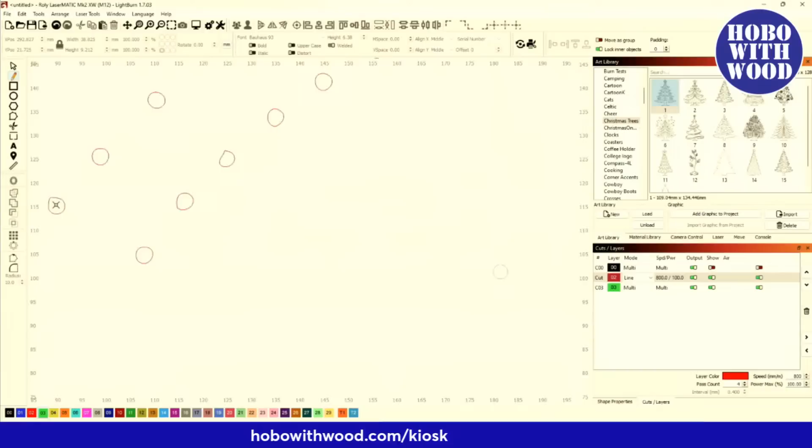So if I come back over here, I grab my pencil tool and come right in here, get right, and it's kind of tricky. I'm going to get right there in the center. There we go. Start my line, scroll out, come over here and see how far out of line that is. It's really jacked up, it's messed up. So I'm going to get to where I feel like I'm close to about the center of that circle, and left click to stop the line, right click to stop drawing.

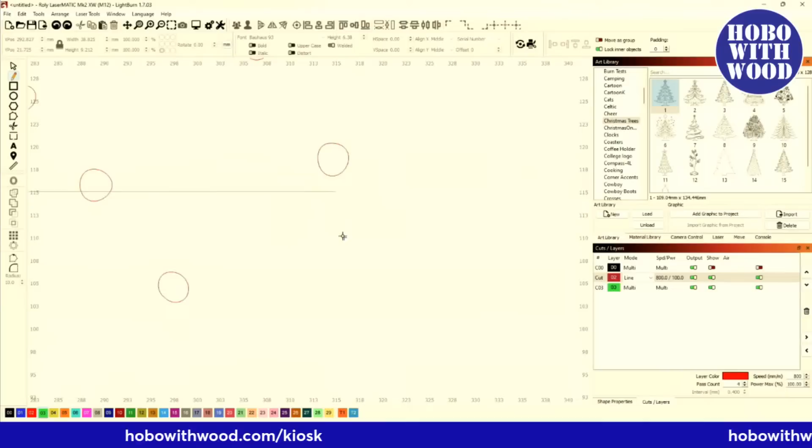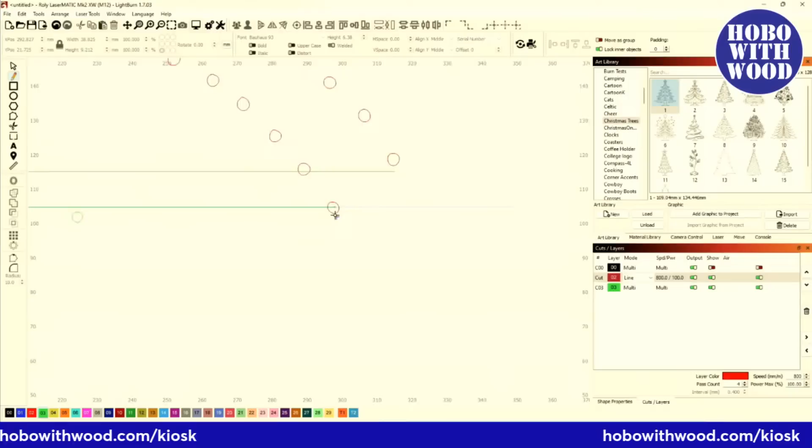Now I'm going to go ahead and get the other one too. I'm going to grab that pencil tool, and do the same thing on the bottom. I'm going to get in here, get tight, get right there, left click to start it. Come over here, hold shift to make it a perfectly straight line, and get to where it's about right. Left click to stop the line, right click to stop drawing.

Now I can take both. I need to get my selector tool first. Get both of those, go into node editing, use the letter M for middle. Or actually, you know what, before I do that, I'm going to make sure that the lower one is centered with this one.

Now I know it's perfectly spaced. I'll select them both, go into node editing, and use the letter M for middle, which should put my nodes right above each other.

Now you can move them up together, but you'll need to separate them in a minute. Select them both and take them up. I'll use shift and bring it down a little bit to about there. Now I can hover over that node, hit the letter S twice, and that makes it a little bit more of a curve.

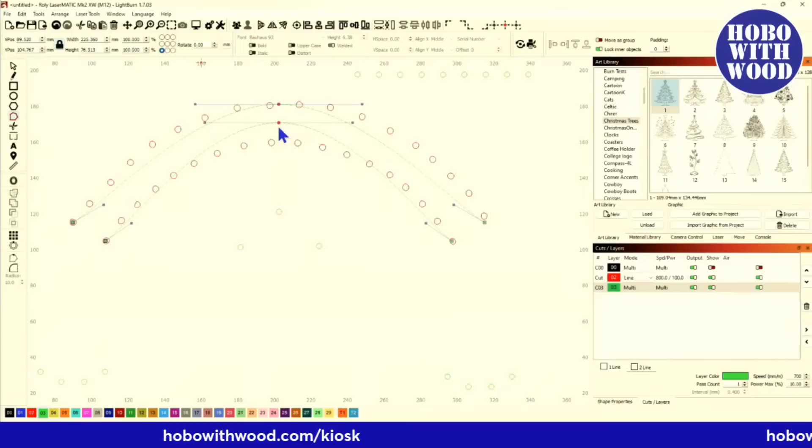But you can see this one's way too high, so I'll click anywhere to deselect, select just that one, hold shift, and bring that down to about there. That looks like it's about the center of those.

I'm going to move my handles the same way I did on the other, twisting them up to where they're right in there on the line. Be careful not to stretch your handle out, because that will change your curve. Try to keep its position relative to the distance from the corner node the same. Just move it up to overlapping.

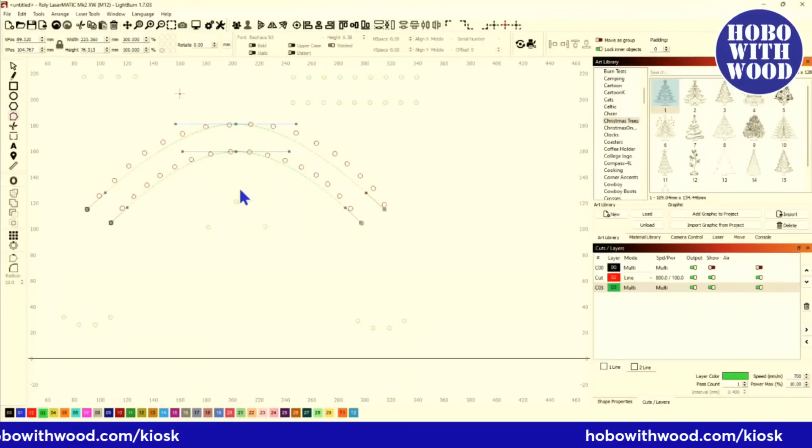There may be a little bit of asymmetry here if you don't get them exactly, but those are going to be really darn close. Now with that done, all you have to do is the same thing one or two more times. Draw out a perfect circle, 3 mil.

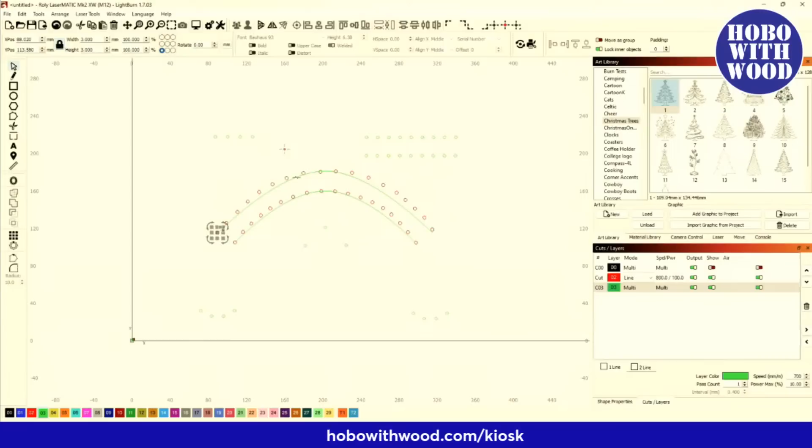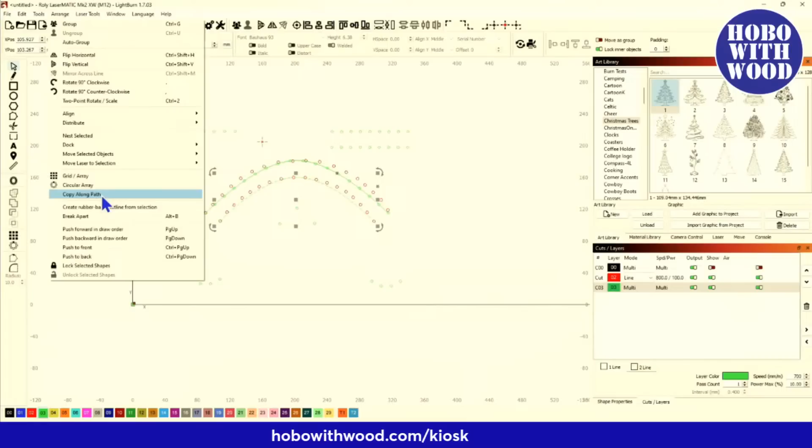Come in here and put it right on the end of that line. I've already counted, there's 18 of these. Hold shift, select that, and tell it arrange, copy along path, 18 copies, and say okay. Now I can grab that one, Control D to duplicate it, bring that duplicate down to that line, hold shift, select the toolpath or that line, arrange, copy along path, 18 copies.

Okay, now I can turn off my green, select all of those and hit delete, turn back on my green. I've got all those, turn my black back on, and those are positioned.

What we just did is going to be perfectly symmetrical. They're going to be all perfect 3 millimeter round circles cut out for his pegs, completely symmetrical with each other from left to right. But now the asymmetry of the rest of the design becomes glaring in some places. Close enough works if you're doing scroll saws and drills, but when you're working with lasers, close enough really doesn't cut it.

I don't know how much of the design, Dale, you redesigned or reworked, but I got some ideas with this piece, and I'm going to redo the entire design, and even redo the game. I'm going to change it up completely and offer the Hobo version of this. I don't feel like I'm copying them because mine's going to be completely different. It's going to be the same concept, but a cup and a cup are both cups, one's not identical. They're not the same thing.

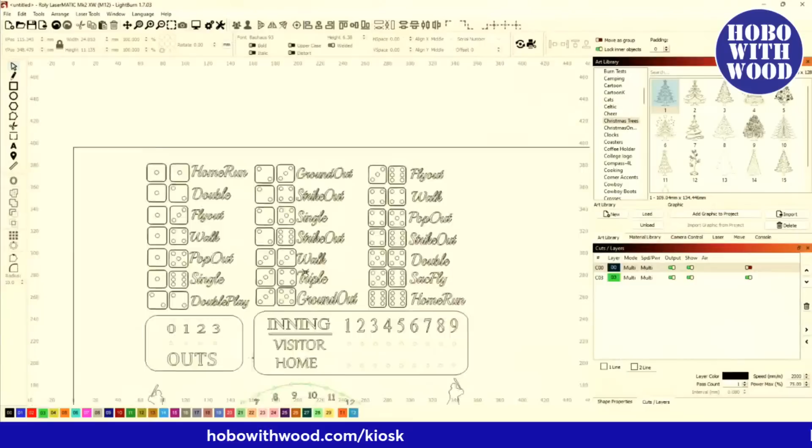So I would add a few things. I'd add a strike, I'd add a ball, because you could even roll 4 balls and get a walk. And the way this works with the pegs and holes, as you roll you would move your pegs accordingly - here's first base, second base, third base. There's no peg for, hey, I got a home run.

But I would also add - you've got up here for outs, but I'd add a place for balls and strikes. It would really make the game last a whole lot longer, and you might throw the board at each other before you finished it. You might even do, instead of 9 innings, only play 1 inning at a time.

But here's what I've been doing. And I shared this Christmas tree file with my patrons - I mentioned that to you. But if I go to my dice... where are my dice? There we go, I double click this one, bring it in here.

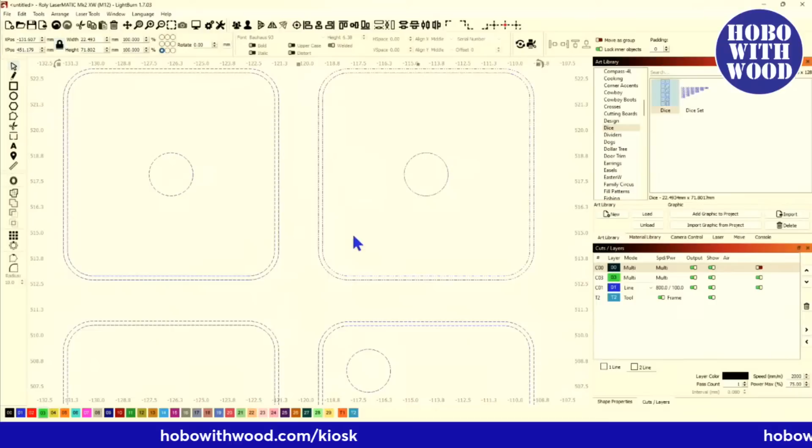Look at that symmetry. Look at that. Look at how clean all that is and how professional all that is. It is super, super clean. It's going to laser like nobody's business.

And then I've got over here the complete set of all the possible combinations. There's all your ones with the 1 through 6. Here's all your 2s, and you don't have a 2 and a 1 because you got it over here. So there's your double 2s and the 3s and 4s. And if we look at all of them, they're all perfect.

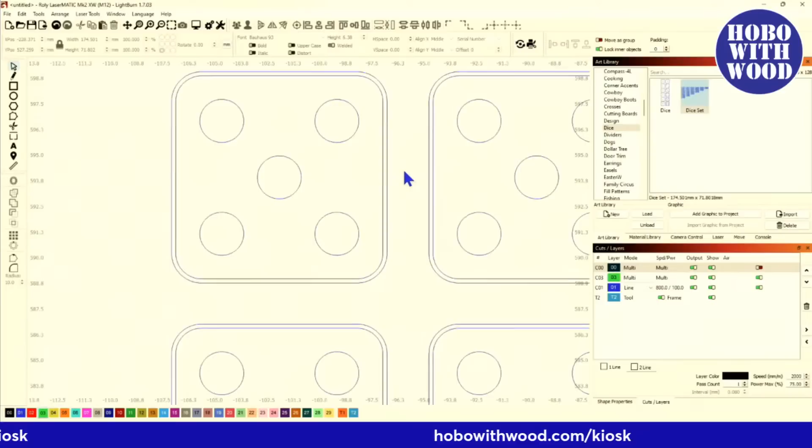And that's the kind of stuff that I do with my designs. I want perfection - not that I'm perfect. I'm not perfect, I'm far from it. But I want my designs to be as close to perfect as I can get them.

So if you ever go to hobowithwood.com and purchase a file and you find a problem with the file, that is a true problem, not something you just didn't understand or the way I intended it to be used. And this happens, folks. If you find a problem with my file and say, hey, I found an issue here, look at this, I'll go fix it. I'll refund you - if you bought the file, I'll refund your money. And then I send out the amended file to everyone who's already bought the file. I bet you ain't nobody on Etsy doing that.